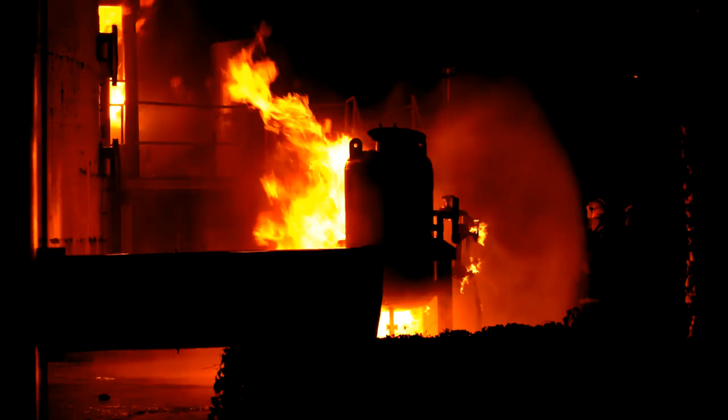A single pickup truck, a cloud of vapor, and 15 people dead. This is the brutal science of why gasoline is quite literally the most dangerous liquid in your life. Most of us pull up to a pump every week, pull a plastic trigger, and watch a clear liquid flow into our cars without a second thought. But what you are handling is a chemical cocktail so volatile it took a 10-story tower of fire and pressure just to create a single drop. We think of it as just filtered oil. The truth is much more dangerous.

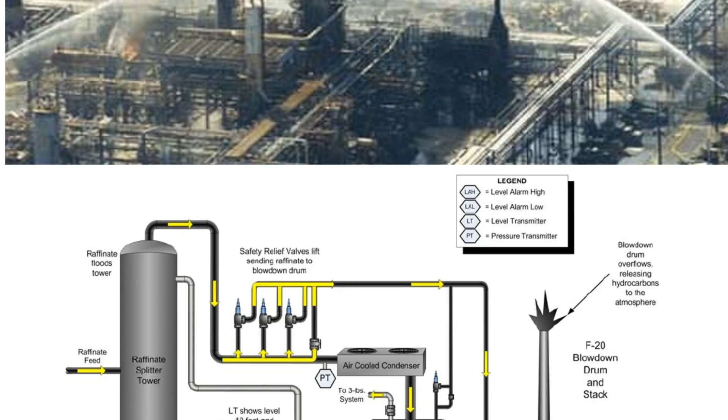On the 23rd of March, 2005, at a refinery in Texas City, a single false reading on a level transmitter turned a 170-foot distillation tower into a massive bomb. 2 million liters of hot, flammable hydrocarbons overflowed, creating a vapor cloud that incinerated 200,000 square feet in seconds. This is the reality of the fuel that powers 800 million vehicles across the planet every single day.

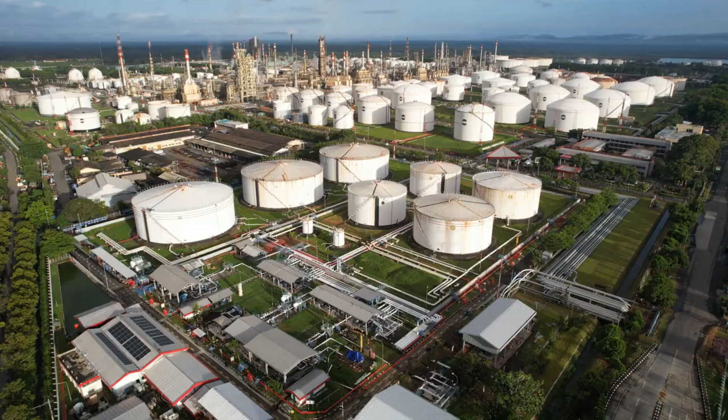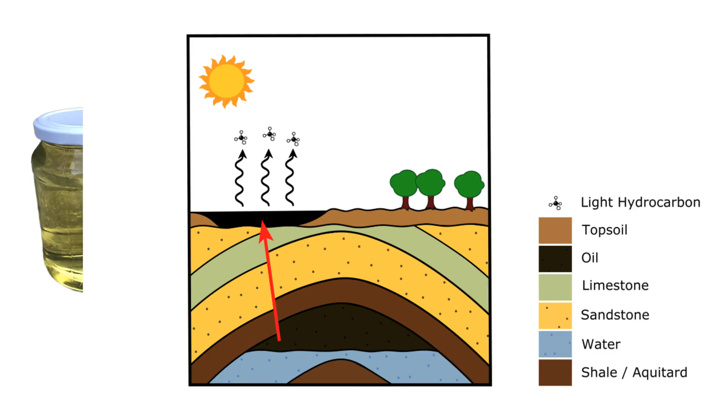To understand the danger, we first have to understand the staggering scale of the system. We burn through 7 billion liters of fuel every 24 hours. But gasoline doesn't just exist in nature. It's hidden inside porous rock miles beneath the Earth's surface, and finding it requires a process that is essentially giving the entire planet an MRI scan. Geologists use seismic surveying, blasting powerful sound waves into the Earth to map out ancient rock formations that haven't seen the sun for hundreds of millions of years.

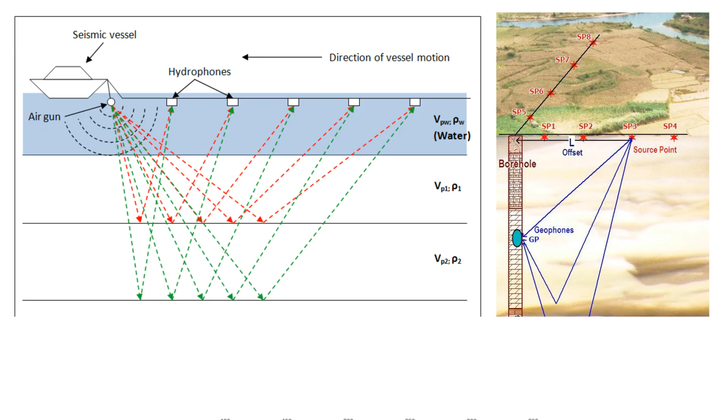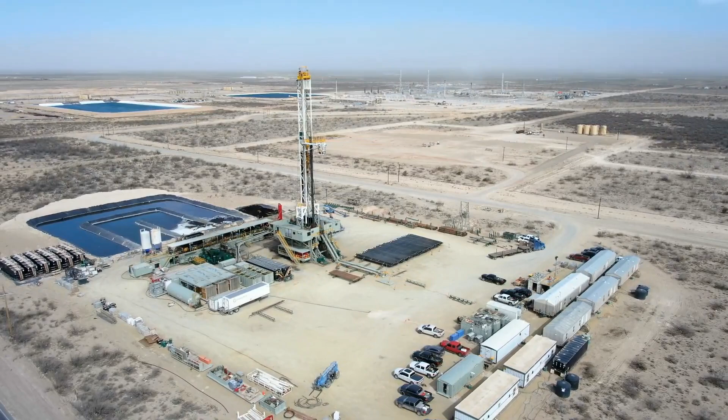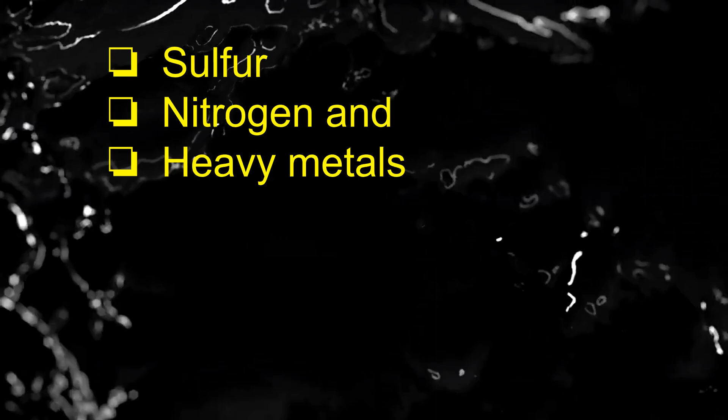When we finally find it, we don't just punch a hole in the ground. We use drill strings thousands of feet long, cutting through granite and shale, while circulating a specially formulated drilling mud to prevent a blowout, a catastrophic rush of high-pressure fluid that can trigger an immediate inferno. Once that crude oil is pulled from the depths, it is essentially useless. You cannot put raw crude in your car. It's a thick, viscous mixture of impurities, sulfur, nitrogen, heavy metals. It's a raw material rich in potential, but trapped in a molecular prison.

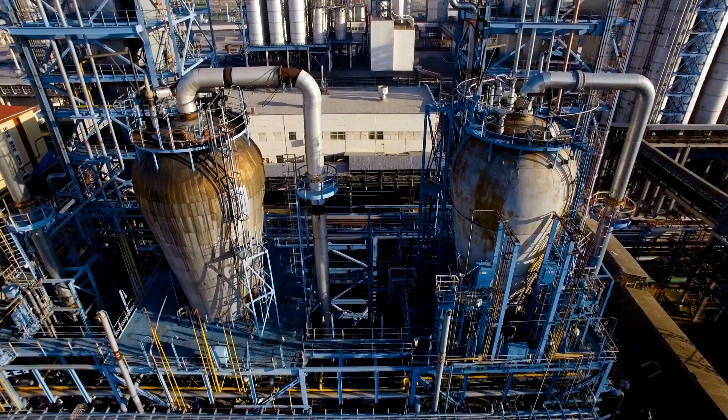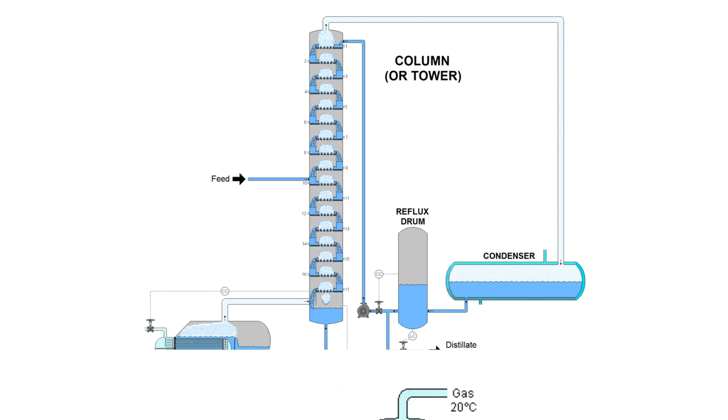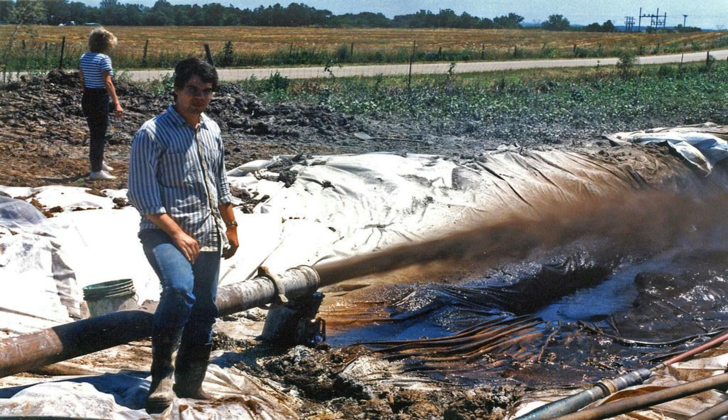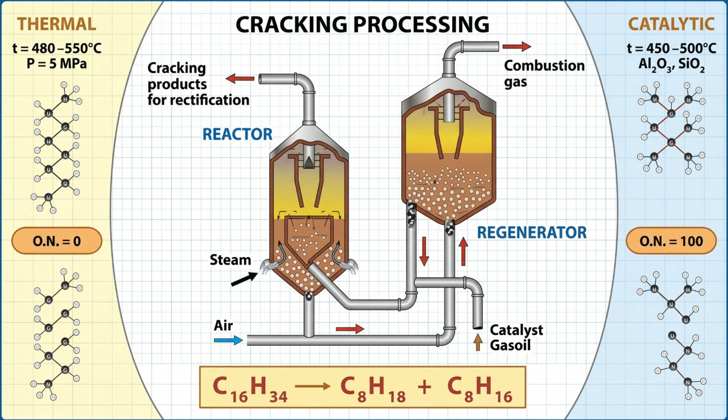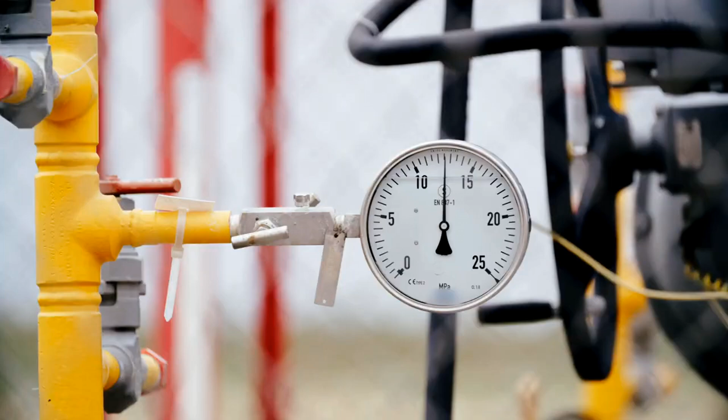But here's the problem. A single barrel of crude only naturally gives us about 19 gallons of gasoline. That isn't nearly enough to keep the world moving. This is where the brutal science really begins. To get more gasoline, we don't just filter the leftovers, we shatter them. Using a process called catalytic cracking, we take those heavy, long hydrocarbon chains that are too thick to be fuel and blast them with heat and pressure in the presence of a silica or alumina catalyst. This literally shatters the heavy molecules into the lighter ones your engine needs. But if catalytic cracking is the brute force of the refinery, hydrocracking is the VIP equipment. It is the refinery's most important and expensive secret, operating at a mind-bending pressure of 160 kilograms per square centimeter.

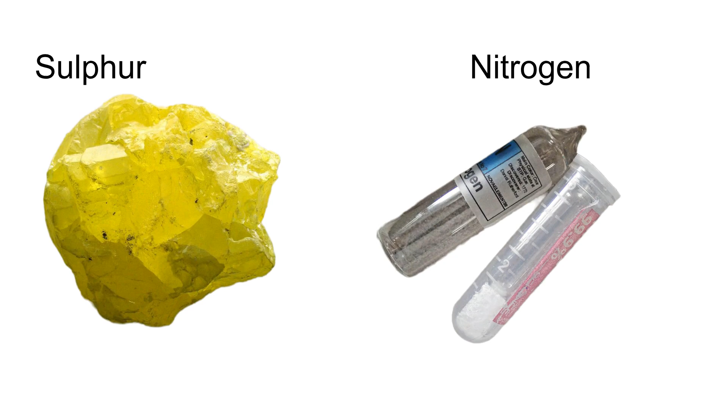In this high-pressure environment, impurities like sulfur and nitrogen are stripped out completely. Hydrogen is then forced into the molecular chains to create a clean-burning, high-performance fuel that meets modern environmental standards. Without this single piece of engineering, your car would be spewing black soot into the air every time you drove.

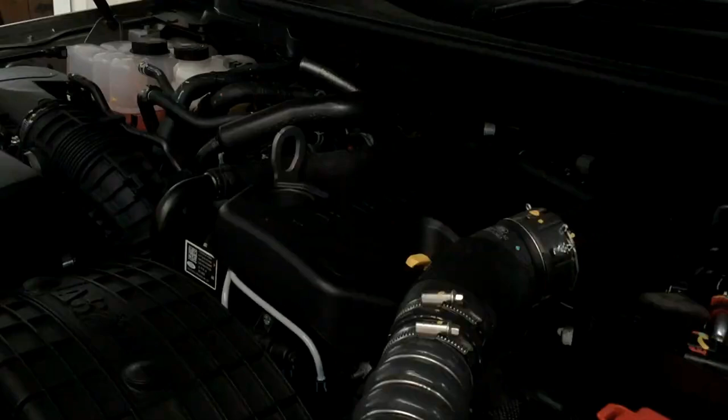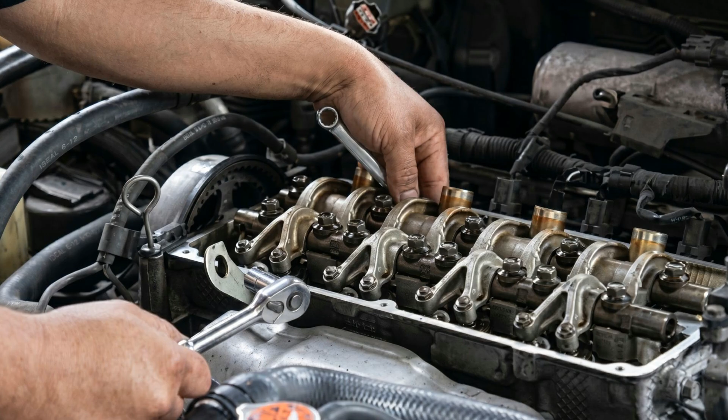But we still aren't done. Even this shattered, cleaned oil would destroy your engine. If you used pure, unrefined gasoline, your engine would experience something called knocking, where the fuel ignites too early inside the cylinder, essentially trying to blow the engine apart from the inside.

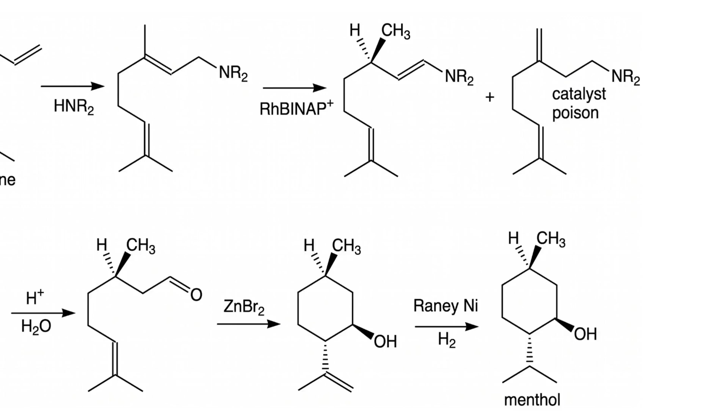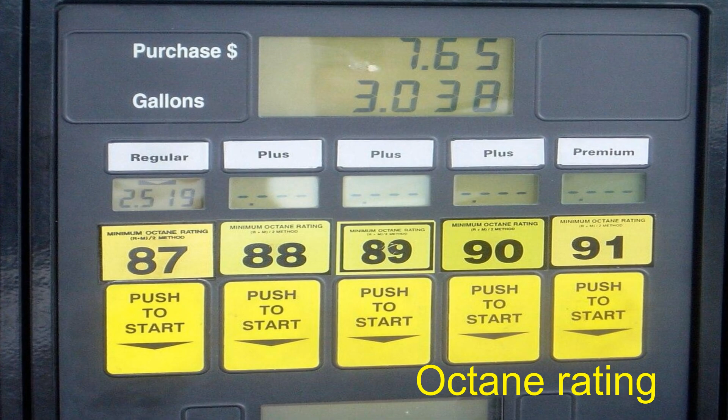To stop this, engineers use a process called isomerization, taking straight-chain molecules and reshaping them into branched molecules that are far more stable under pressure. This is what gives us the octane rating you see at every gas station. A higher octane number isn't about more power. It is a measure of the fuel's resistance to premature explosion. It is a safety rating for your pistons.

And then there is the seasonal secret that almost nobody talks about. The gasoline you buy in December is chemically different from the gasoline you buy in July. In winter, engineers blend the fuel to be more volatile, so it vaporizes easily in freezing temperatures for a quick cold start. Use summer blend gas in a blizzard, and your car might not even turn over.

On top of that, every batch leaves the refinery carrying a specialized additive package: detergents to clean your fuel system, anti-knock agents for performance, and corrosion inhibitors to stop the fuel lines from rusting from the inside out.

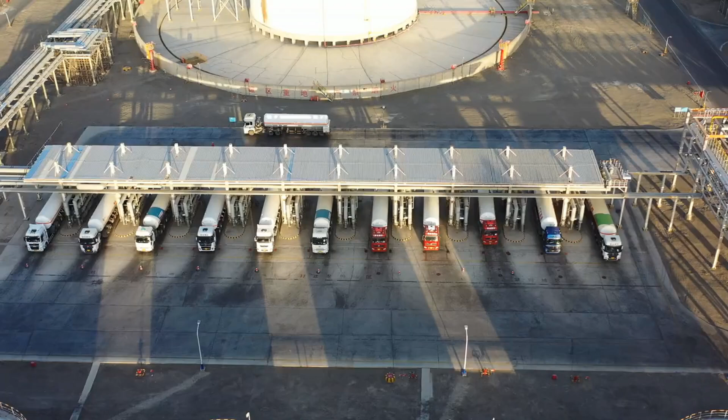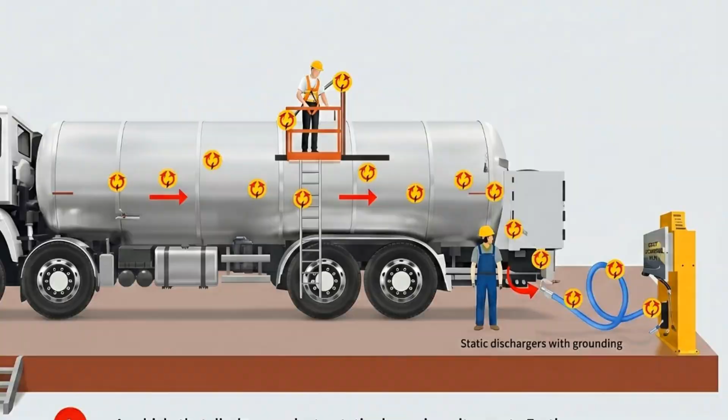The final journey is the most dangerous part of all. Every day, 1 million gallons of this volatile cocktail roll out of refineries in tanker trucks, essentially moving bombs. The metal body of a tanker builds up static electricity just from driving, and a single spark near the loading valves could trigger a catastrophic explosion. To prevent this, every truck must use grounding cables to discharge that static before a single drop of fuel is transferred.

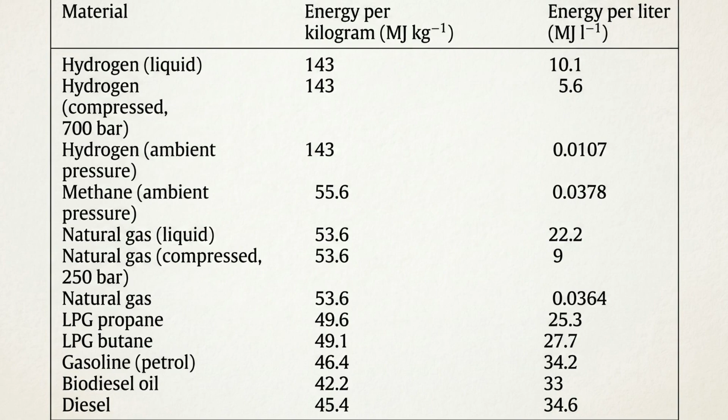Now, recently you may have seen viral videos claiming you can make gasoline from thin air using a device the size of a refrigerator, filtering CO2 from the sky and turning it into fuel at home. Here is the scientific reality. The energy density of gasoline is so massive that building it from scratch is incredibly inefficient. Producing just 3.8 liters of gasoline from air requires 75 kilowatt hours of electricity. That same electricity could power a modern electric vehicle for over 600 kilometers.

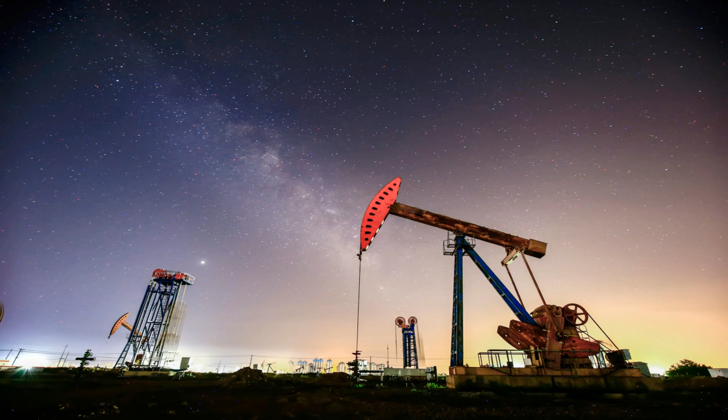Gasoline isn't just old technology. It is a miracle of nature and engineering that we are only now realizing is nearly impossible to replicate cheaply. The next time you pull that trigger at the gas pump, remember what you are actually holding. A liquid pulled from miles underground, superheated to 700 degrees, shattered at a molecular level, precision engineered to be just stable enough not to blow up your car. It is a century of human ingenuity, a high-stakes balancing act between power and catastrophe.